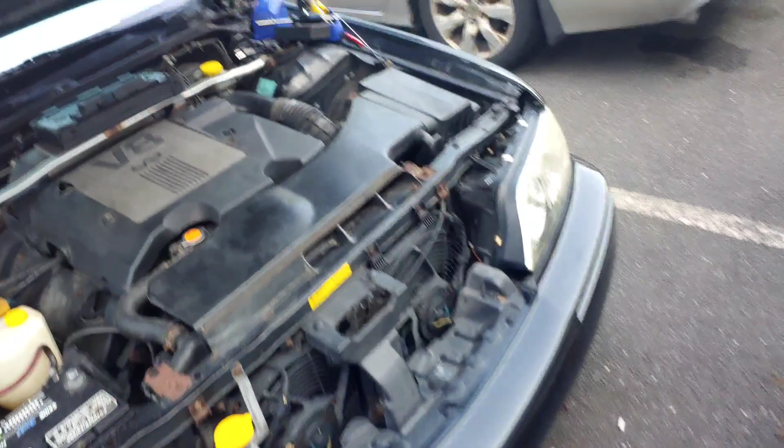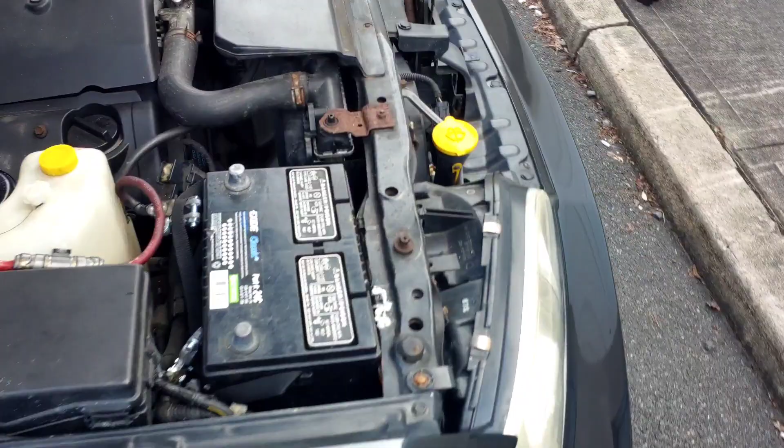Okay, this is a 97 Infiniti Q45, I think. I got to wire in some headlights. Got aftermarket ones in there, and something with the wiring. So I got to get it apart first, but I want to hook the battery up.

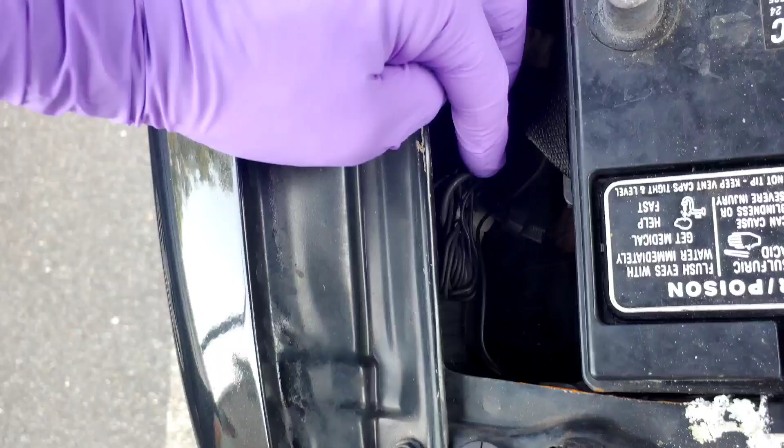See if I can scan any codes. I don't know what all this is. I don't know what that is. This has an immobilizer problem as well.

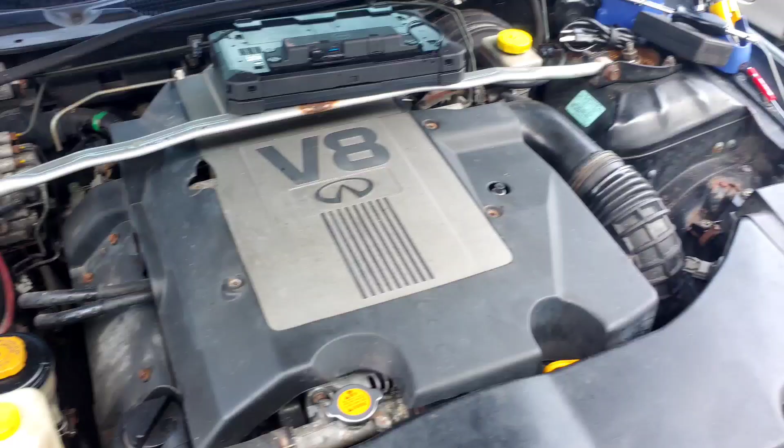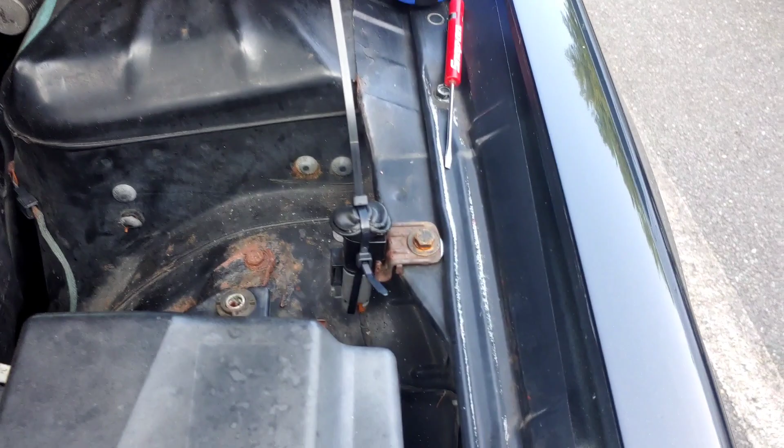I'm pretty sure I can't handle that. I'm going to take a quick look though. I tried to help this guy out over the phone, so I am going to take a few minutes to take a look at it. I zip tied the hood switch down. That can affect the theft system.

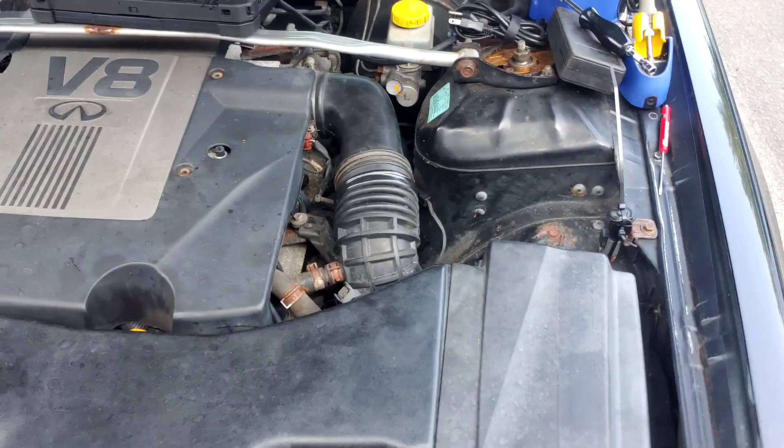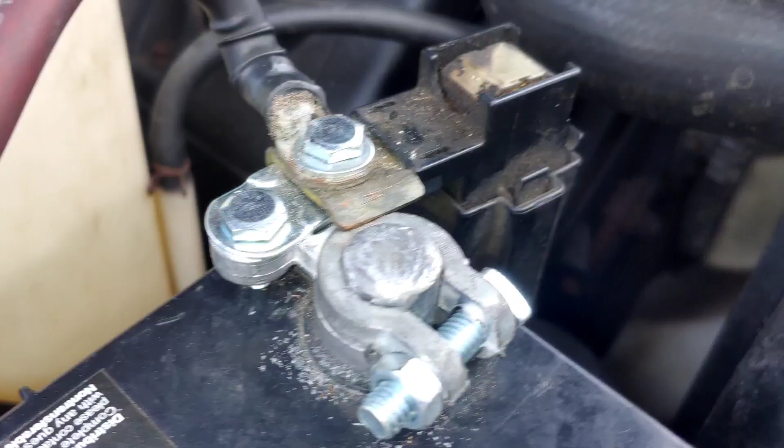So first thing I'm going to do is hook this battery up and see if I can get any kind of codes out of this. Alright, just wanted to note how awesome this is here. And it's tight, but yeah, you got some kind of nest in there. I don't know.

I don't know if I'm going to be able to get any codes out of it because the battery was disconnected, but we'll see. I'm hooked up here and I'll put the key in.

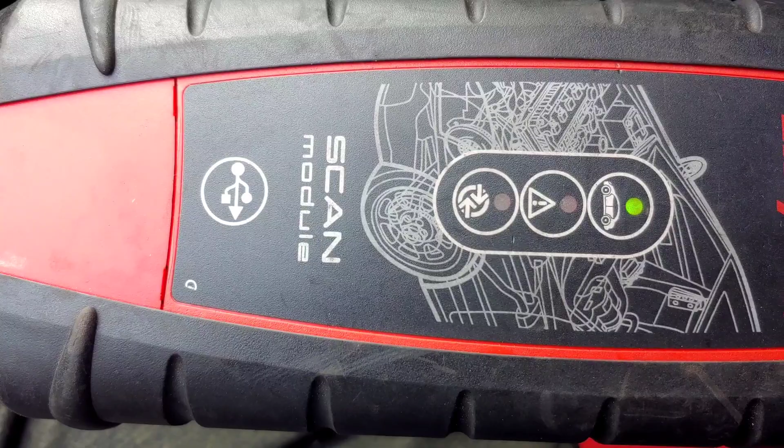Right, security light is not flashing right now. I don't think, right? Can't really tell. Yeah, but I'm not getting any. Okay, never mind, I think it is. Alright, it wasn't doing it at first. It might just be a little slow. Or maybe I'm a little slow.

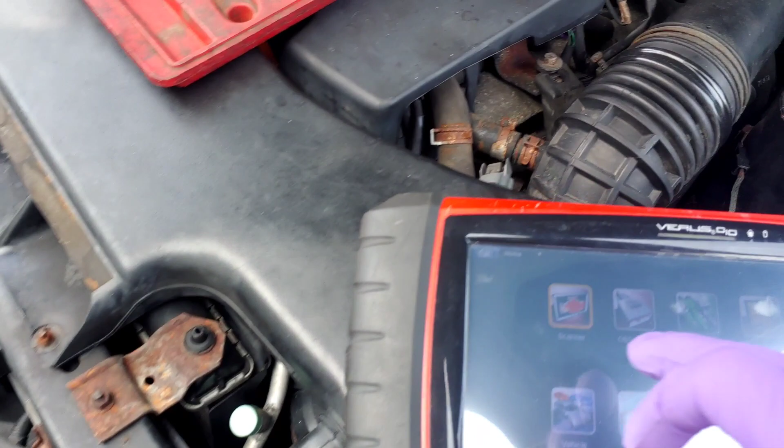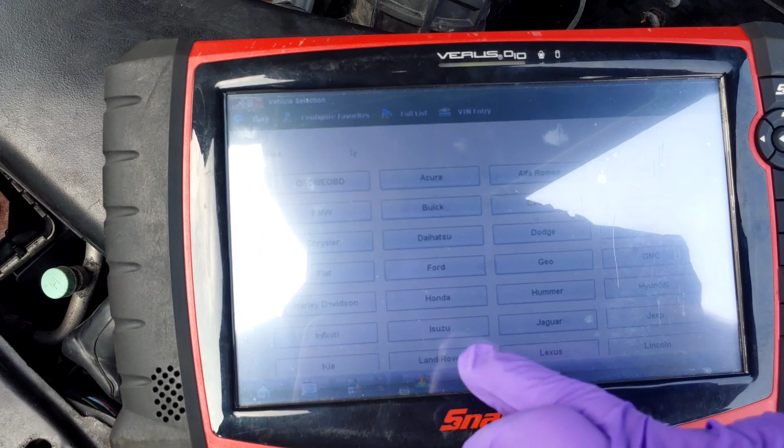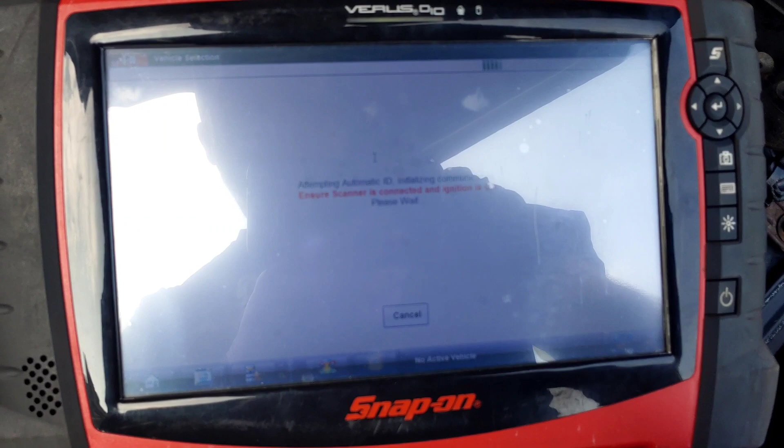Let's see if I can talk to it. And Infiniti, I don't know if this supports automatic, attempting automatic. Okay, come on.

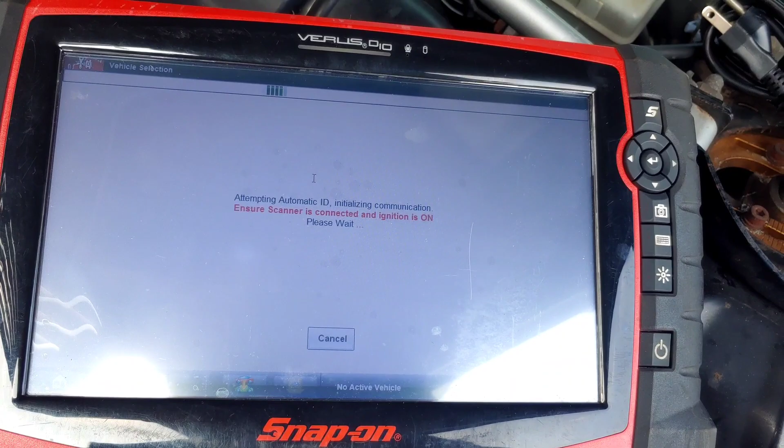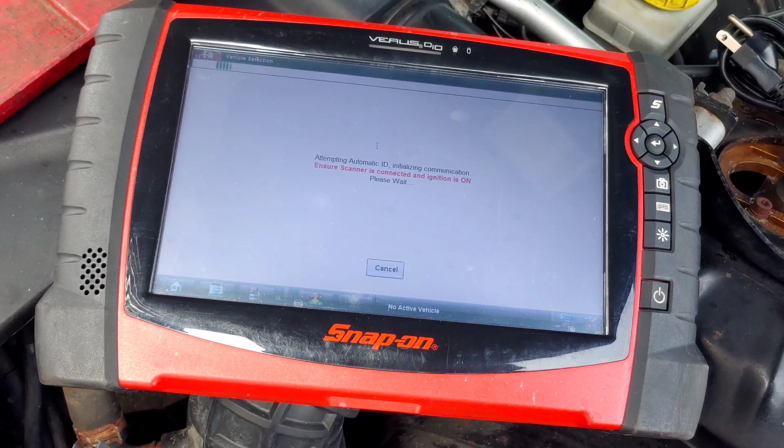I haven't checked the headlights to see if they work. I mean, that's sticking out, I don't know what's up with that, but I'm going to let this do its thing. I'm going to check in the trunk for the headlights that I got to put in it and get back.

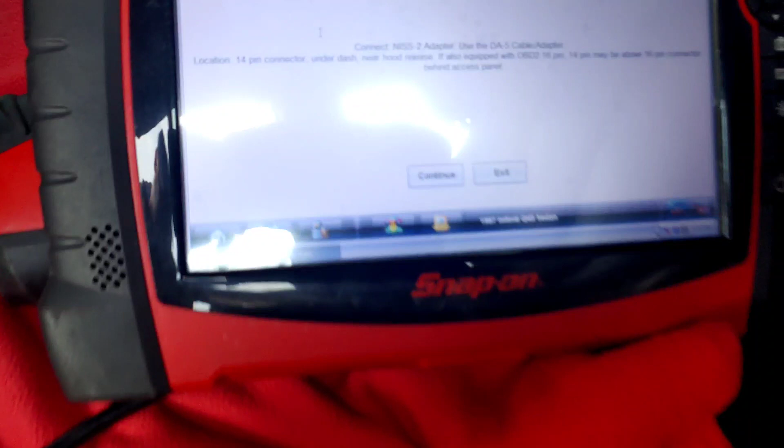Alright, for now I'm going to skip the code read as I have to see if I have my adapter here. I'm pretty sure I do have my adapters, but the OBD2 port's not giving me anything that I need.

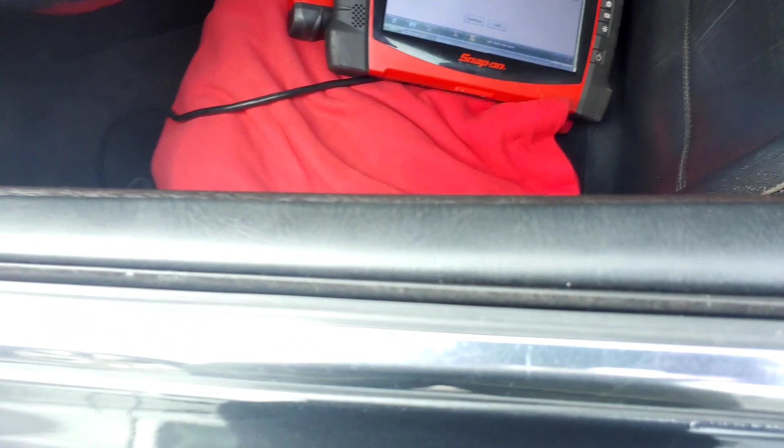Pretty sure these headlights don't work. Wonderful, I don't know what that is. 3. This probably goes in here, I'm hoping. Looks like fun.

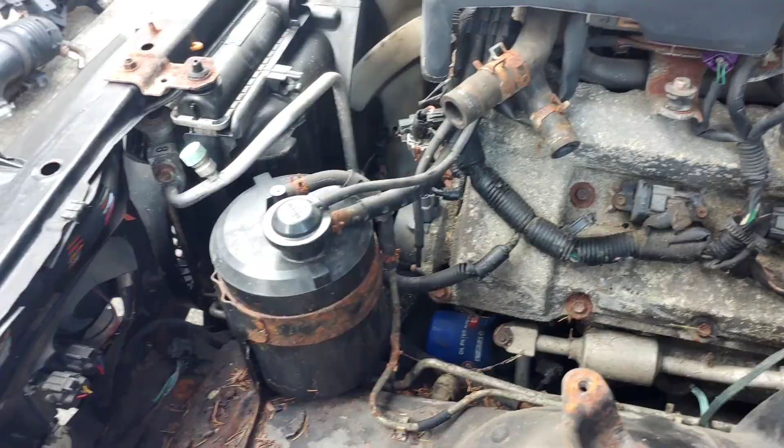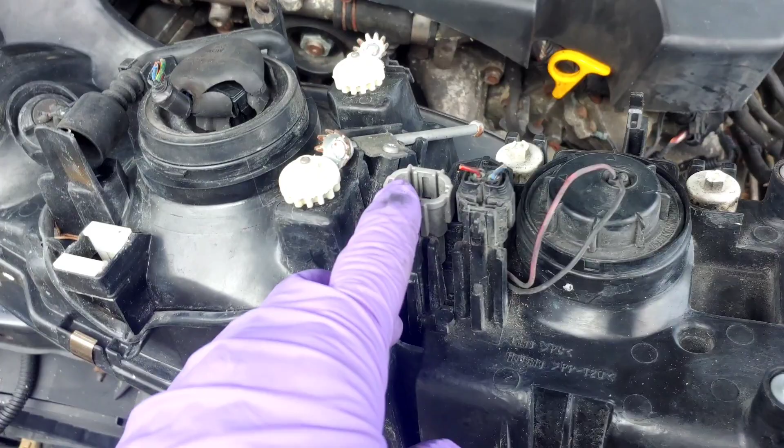So these are the wrong headlights, but he still wants me to try to wire them in. I'm not sure I can. This goes here for the marker or the corner light. This is your headlight, and this is the high beam. So I'm going to have to try to get one system to work without the other.

This is the system for these headlights that he wants me to use, right? Without daytime running lights. Now, I don't know if you can see here. Right there, that's the high beam, which is this one here. On the old one, the high beam...

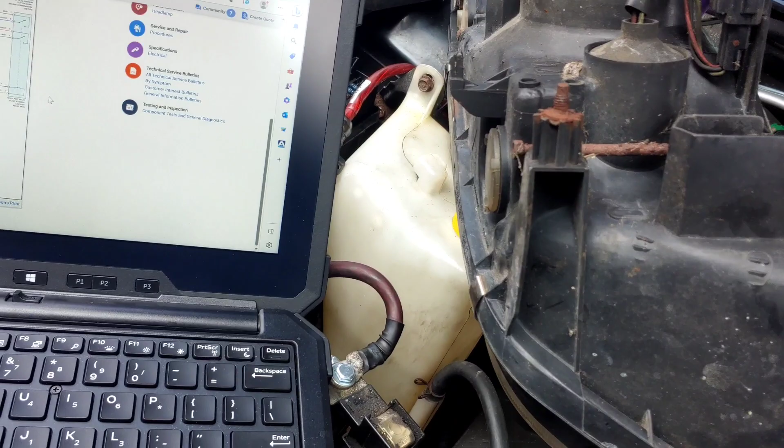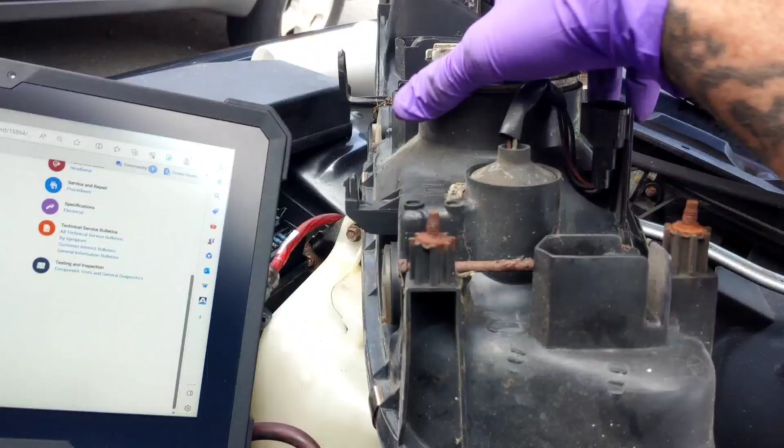It's all inside here, there's one connection. So I'm going to get a plan together, and then I'm going to see if he really wants me to do this, because on this one, this is just run by the headlamp relay, right?

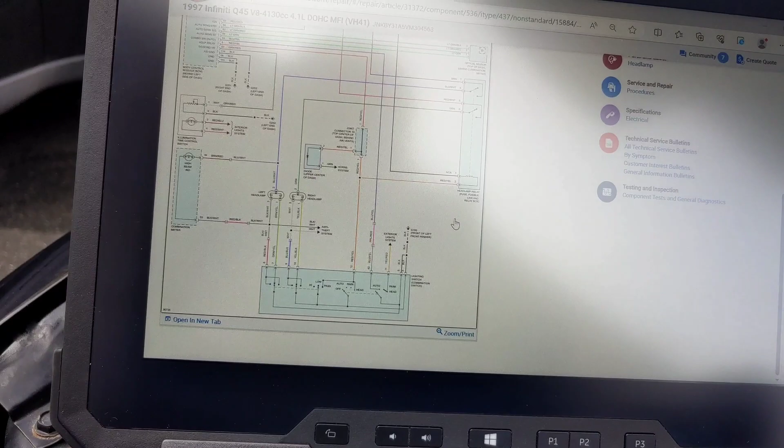Which this vehicle is not equipped with these headlamps, right? This vehicle is not equipped with these headlamps. This is the one that it's equipped with from the factory, okay? And it has a daytime running light control unit, left front shock tower.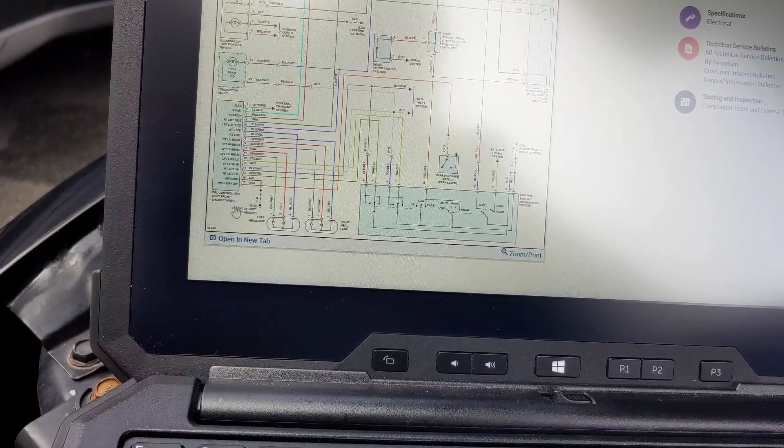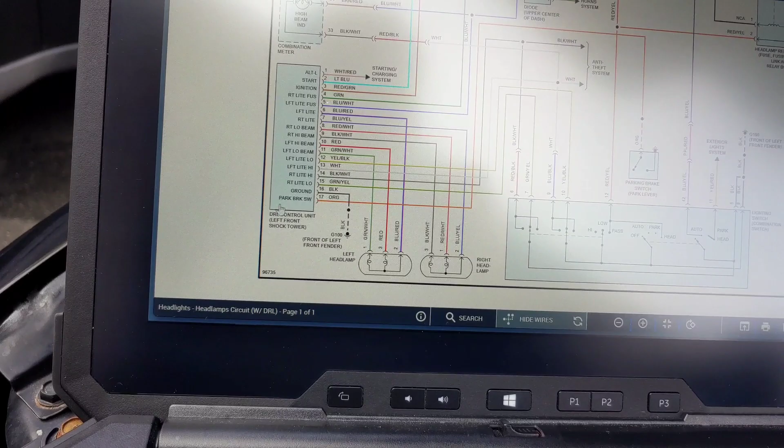Let me go in here real quick. You can see the headlamps are run off of that. Okay, that's your headlamps. And I'm assuming that these... I don't know, I gotta find what the other one is, what the other connector is.

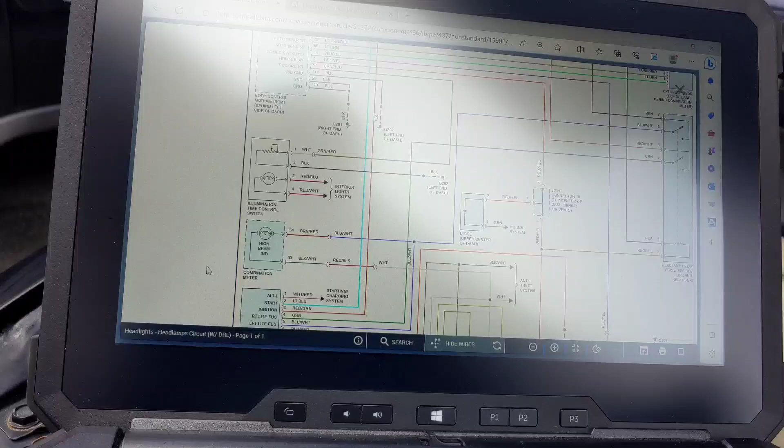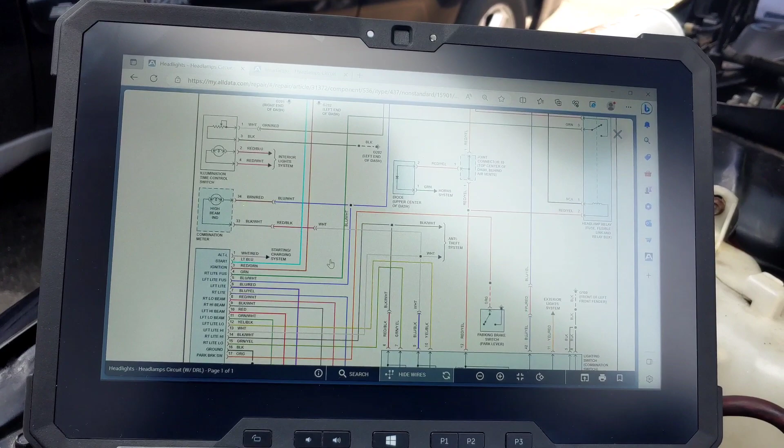Parking brake, switch lever, blah blah blah. I'm pretty sure, well, here's the high beam, right? Which is, that's the high beam indicator. And this is illumination time control switch. I don't know what that is. But...

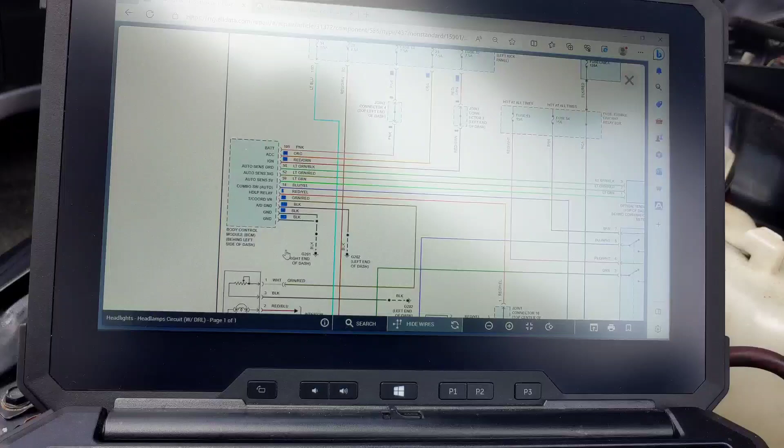I don't see the corner lamp on here. I might have to go through a different wiring diagram.

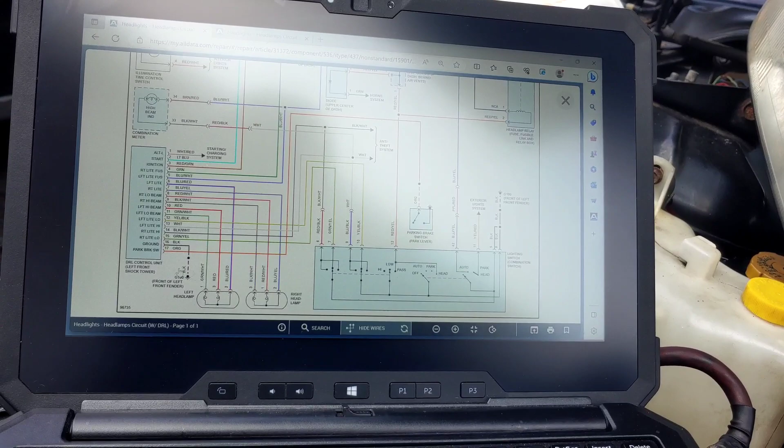And anti-theft, he's concerned about the anti-theft. That's for the flashing lights and everything. I don't know. I always get the really good ones.